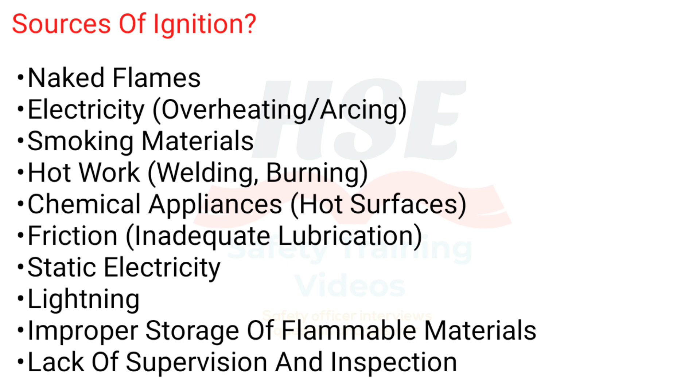Sources of ignition: naked flames, electricity, overheating, arcing, smoking materials, hot work, welding, burning, chemical appliances, hot surfaces, friction, inadequate lubrication, static electricity, lightning, improper storage of flammable materials, lack of supervision and inspection, harm to persons from fire.

Main effects: being burnt, inhaling toxic fumes, effects of smoke inhalation, depletion of oxygen supply, harm to persons from fire. Other effects: collapse of building, crush or other injury sustained while escaping.

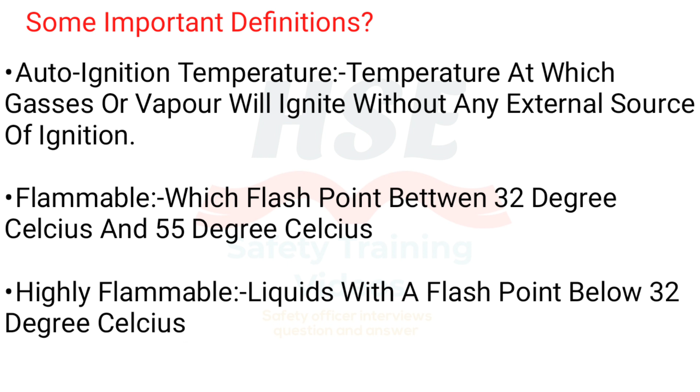Some important definitions: auto-ignition temperature is the temperature at which gases or vapor will ignite without any external source of ignition. Flammable: flash point between 32 and 55 degrees Celsius. Highly flammable: liquids with a flash point below 32 degrees Celsius.

Principal causes of spread of fire: 1. Conduction, movement of heat through materials. 2. Convection, movement of hot gases up through the air. 3. Radiation, transfer of heat through air. 4. Direct burning, combustible materials in contact with naked flame.

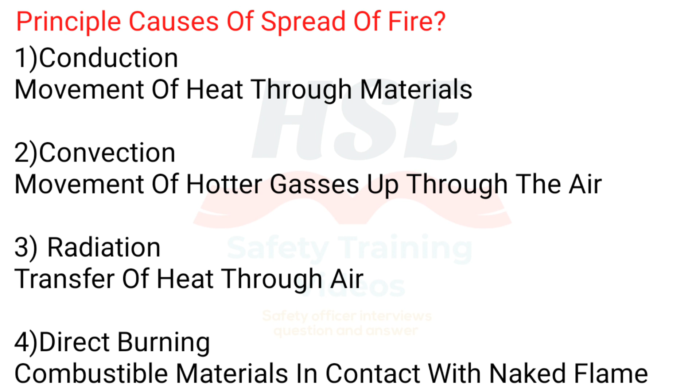Causes of fire: deliberate arson, electrical faults, misuse of electrical equipment, smoking materials, smoking in prohibited areas, loss of control, burning rubbish, heating equipment, unsafe storage of materials, flammable liquids, gases, welding, hot work, mechanical heat friction.

Classification of fires: A. Combustible solids, B. Flammable liquids or liquefied solids, C. Flammable gases, D. Flammable metals, F. Combustible cooking media. Fires involving electrical equipment are classified according to the source of ignition rather than fuel source.

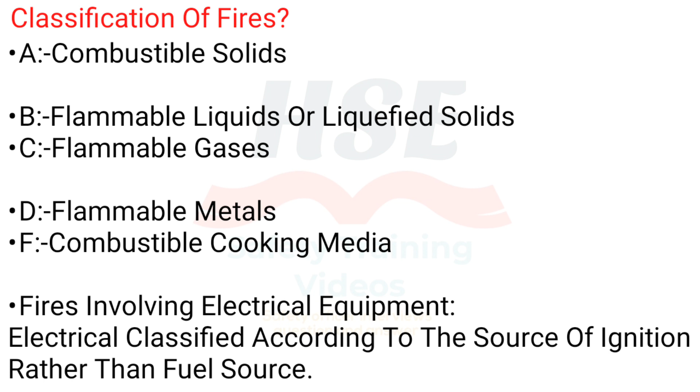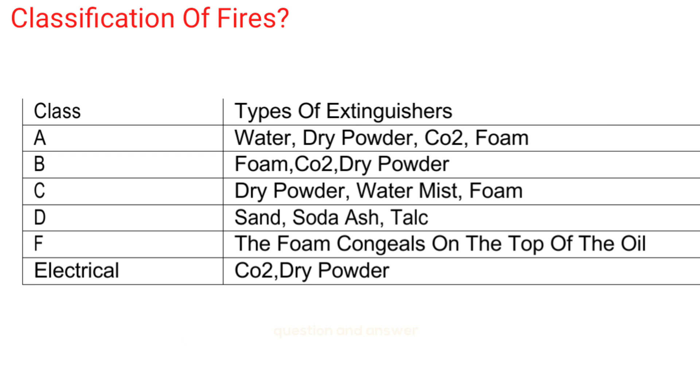Class types of extinguishers: A. Water, dry powder, CO2, foam. B. Foam, CO2, dry powder. C. Dry powder, water mist, foam. D. Sand, soda ash, talc. F. The foam congeals on the top of the oil. Electrical: CO2, dry powder.

How to minimize risk of electrical fire: pre-inspection by users, suitability of equipment, inspection and maintenance by a competent person, avoid misuse of equipment, prevent overloading of circuit, correct design and rating for task, isolate if not in use, improved means of protection such as RCD, high standards of housekeeping, staff awareness training.

Fire risk assessment: 1. Identify hazards, the 3 elements of the fire triangle. 2. Identify who could be harmed, persons at risk, particularly the disabled, etc. 3. Evaluate the risk and adequacy of precautions, considering prevention, protection and precautions. 4. Record findings, prepare an emergency plan. 5. Review, if no longer valid.

Factors to consider in fire risk assessment: construction and use of building, flammable materials, sources of ignition, work activities generating heat, methods of control, means of fire detection, means of raising the alarm, means of fighting fire, and maintenance of equipment.

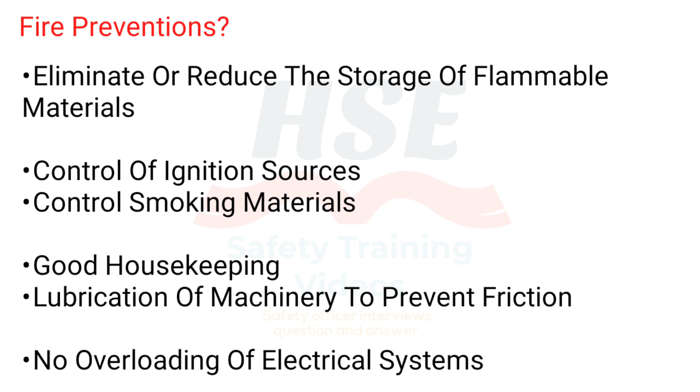Fire preventions: eliminate or reduce the storage of flammable materials, control of ignition sources, control smoking materials, good housekeeping, lubrication of machinery to prevent friction, no overloading of electrical systems, ventilation outlets not obstructed, controlling hot work with permits etc.

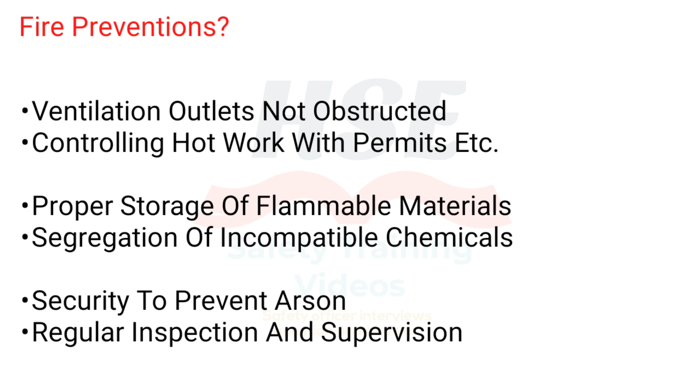Proper storage of flammable materials, segregation of incompatible chemicals, security to prevent arson, regular inspection and supervision, storage of highly combustible, flammable liquids and gases.

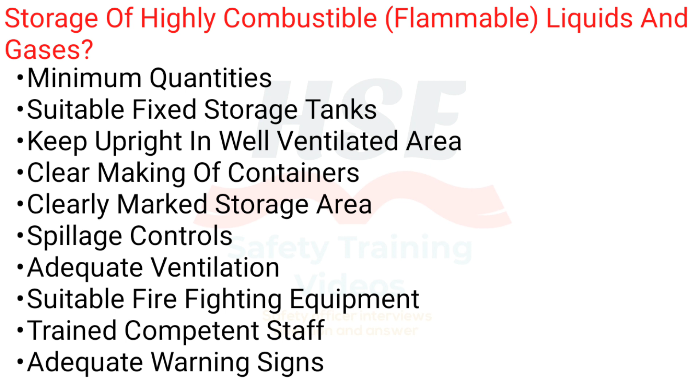Minimum quantities, suitable fixed storage tanks, keep upright in well-ventilated area, clear marking of containers, clearly marked storage area, spillage controls, adequate ventilation, suitable firefighting equipment, trained competent staff, adequate warning signs.

Fire precautions: fire and smoke detection, fire alarms, means of escape, means of fighting the fire, emergency evacuation procedures, suitability of a means of escape.

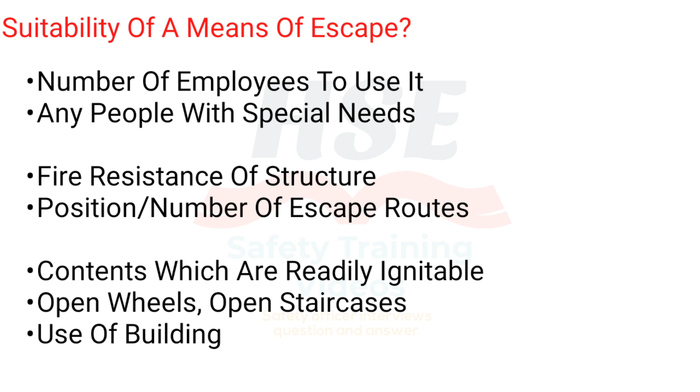Number of employees to use it, any people with special needs, fire resistance of structure, position and number of escape routes, contents which are readily ignitable, open wheels, open staircases, use of building.

Means of escape main requirements: multiple exits, fire resistance of structure, adequate size of numbers, travel distance, clearly marked exits, emergency lighting, exit free of obstructions, final exit door.

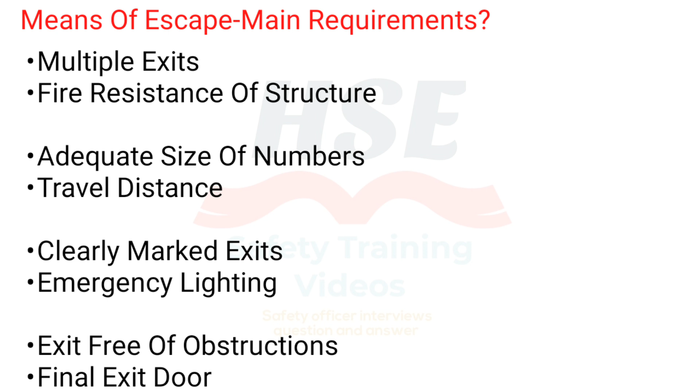Unblocked openings outwards, fire and smoke doors self-closing, fixed stairs to upper floors, exit to a safe place, suitable assembly point.

Fixed firefighting equipment: hose reel, sprinkler. Define hose reel: permanently connected to the main water supply, should be sited in a location which covers the whole area.

Advantages: inexpensive, effective, harmless to health, unlimited supply of water at good pressure, greater force than sprinkler, operators need not be too close to the fire.

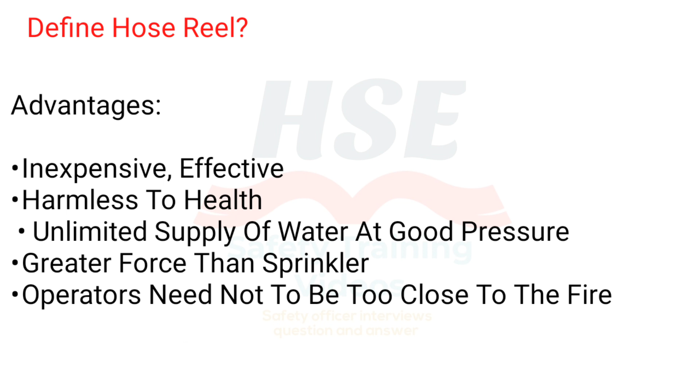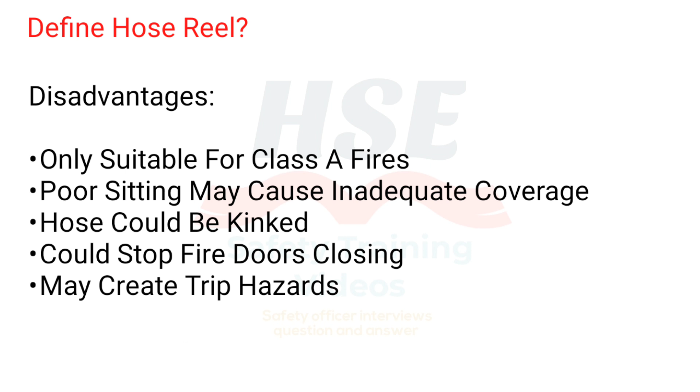Disadvantages: only suitable for Class A fires, poor siting may cause inadequate coverage, hose could be kinked, could stop fire doors closing, may create trip hazards. Define automatic sprinkler systems.

A network of water pipes with spray heads normally at ceiling height is installed in vulnerable areas. Advantages: large coverage of water to prevent the spread of fire in large open-plan buildings where compartmentalization is not practical. Disadvantages: only suitable for Class A fires, causes damage to equipment and furnishings.

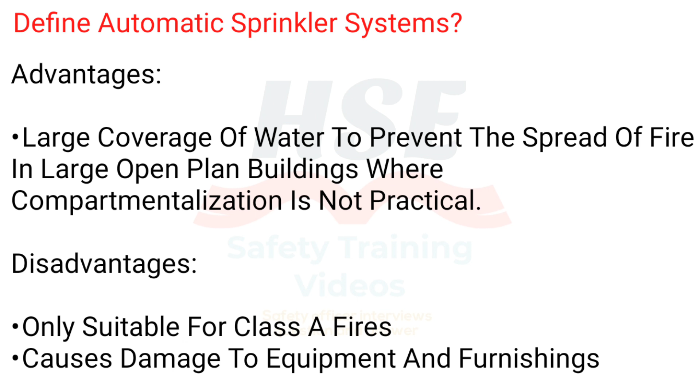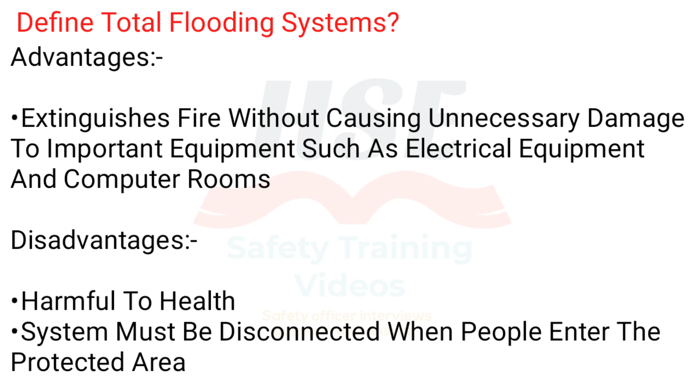Define total flooding systems: a high concentration of an extinguishing gas, usually CO2, is automatically dumped in an enclosed area. Advantages: extinguishes fire without causing unnecessary damage to important equipment such as electrical equipment and computer rooms. Disadvantages: harmful to health, system must be disconnected when people enter the protected area.

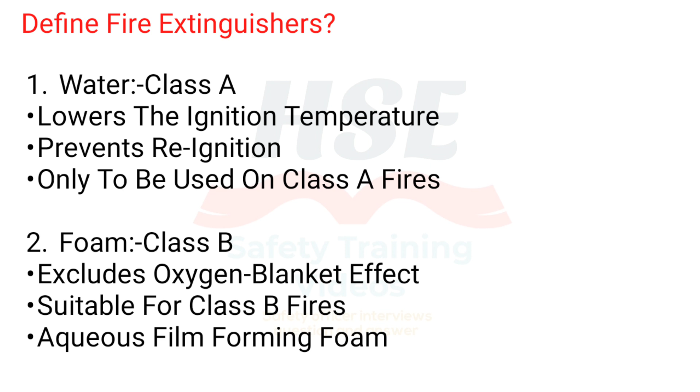Define fire extinguishers: 1. Water, Class A: lowers the ignition temperature, prevents reignition, only to be used on Class A fires. 2. Foam, Class B: excludes oxygen, blanket effect, suitable for Class B fires.

Aqueous film-forming foam. 3. Dry powder, Class A, B, C: powder has a smothering effect but no cooling properties, can be used on all types of fire.

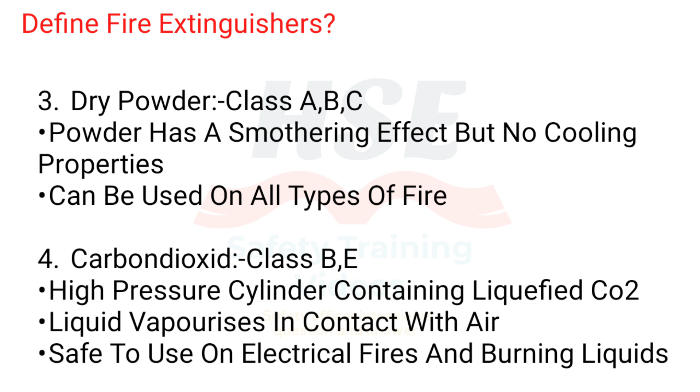4. Carbon dioxide, Class B, E: high-pressure cylinder containing liquefied CO2, liquid vaporizes in contact with air, safe to use on electrical fires and burning liquids.

Inspection and maintenance of fire extinguishers. Inspection: routine, perhaps monthly, visual check to ensure extinguishers are in place, not been discharged or damaged. Maintenance: involves an annual examination by a competent person, with the removal and replacement of equipment found faulty and the date of the inspection recorded.

Daily checks by fire warden, weekly inspection by fire warden, annually serviced by competent person, 5-yearly extended service, discharge.

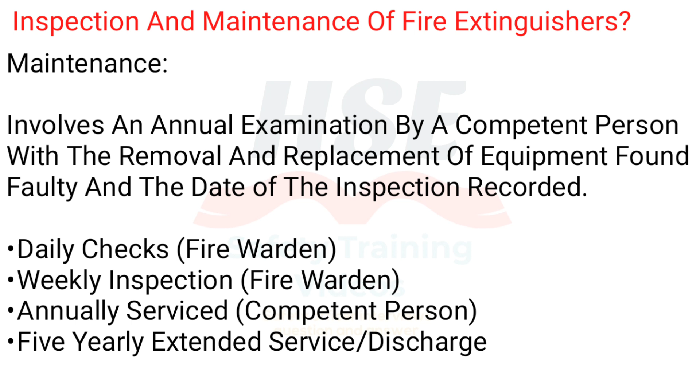Siting of fire extinguishers: accessibility, proximity to exits and escape routes, visibility and signage, located off ground with adequate support, suitable type, protection against damage and weather.

Emergency evacuation procedure: means of raising the alarm, contacting the emergency services, fire evacuation routes, fire evacuation signs, who are in the role of fire marshals, type of fire extinguishers, not to use lifts.

Evacuation in an orderly fashion, practice drills should be undertaken, checking the alarm can be heard throughout the premises, testing the effectiveness of the evacuation procedure.

Familiarizing employees with the alarms, etc., giving fire wardens the chance to practice their roles, satisfying a legal requirement.